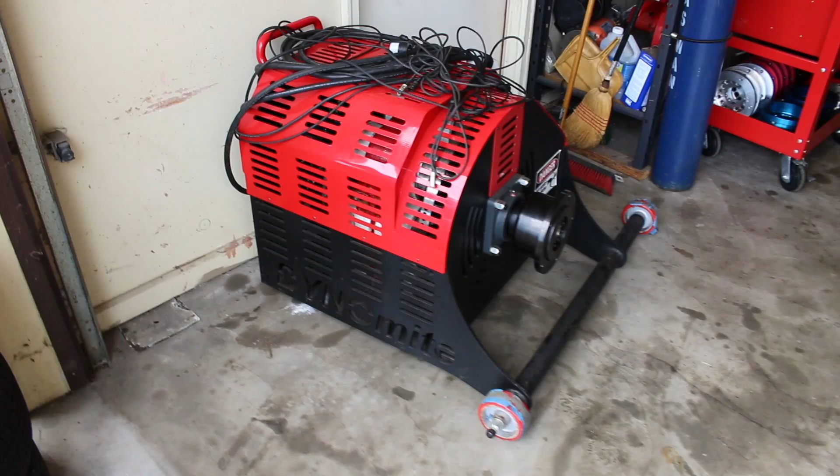For those of you who aren't too familiar about these hub dynos, basically it's the same thing as a roller dyno. However, as you guys can see, it bolts up straight to the hub. So we got Brandon here taking the wheels off just to get it bolted up, real easy setup guys. We'll be back in a couple minutes when she's good to go, and I'll fire the camera back up, and we'll see how much she puts down.

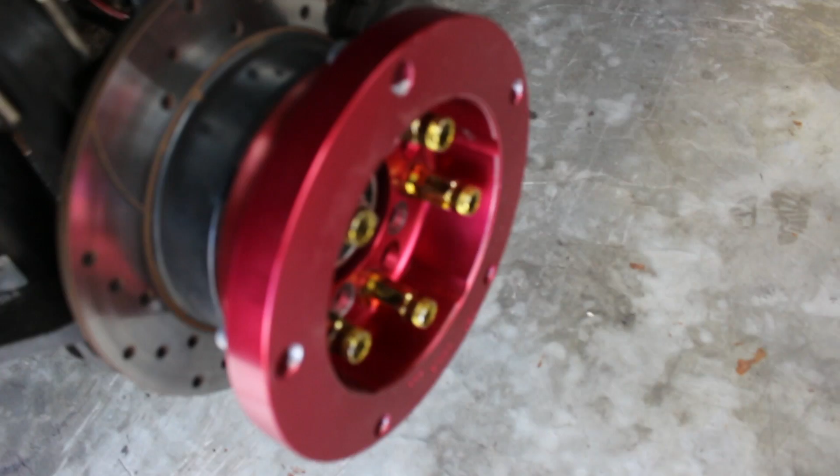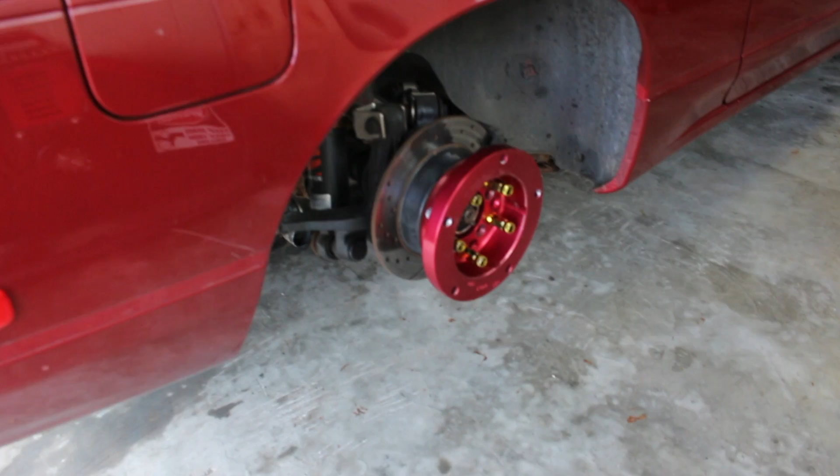Alright guys, well we ran into a bit of a problem here. These lug nuts that I have on my car right now are unfortunately a little bit too long, just because of this little part that sticks out. To fit onto this hub dyno here, the clearance is just thousandths off, so we're about to go get some new lug nuts so we can bolt this up. So we're on the way to AutoZone and we'll be back soon.

We got some new lug nuts from Advance Auto, and we're actually putting them on right now, so we should be good to go in a couple minutes. These guys are making fun of me because I don't know how to use this camera, and I keep recording clips that don't end up recording, but we're gonna get this video done. Like I said, we'll get these things bolted up and show you how these hub dynos work, and we'll touch back real soon.

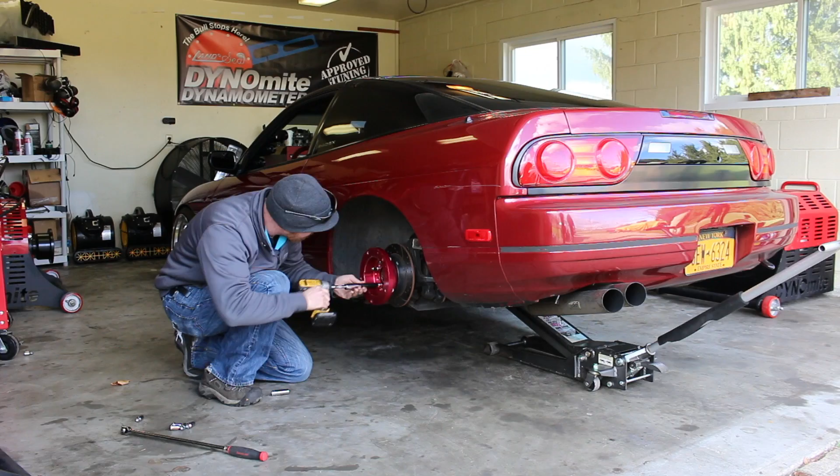Those of you who aren't familiar with these hub dynos, obviously the wheels aren't on, so we got these little adapter plates here that bolt up to the actual hub dyno itself, and Brandon's just going to tell you a little bit how these work in general. I'm just going to flip this mic around guys, give me one second and we'll be back.

Alright, so we've got the adapter bolted on. Now we just got to slide this big heavy absorber into place and get it lined up. I'll do a little fiddling with the jack here.

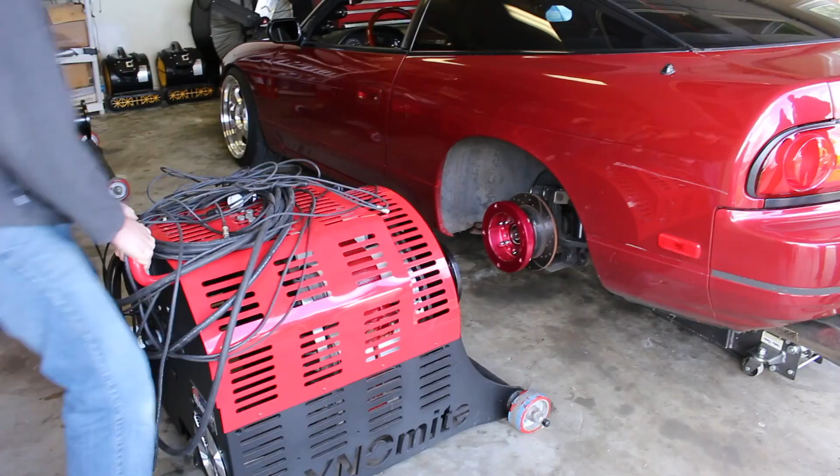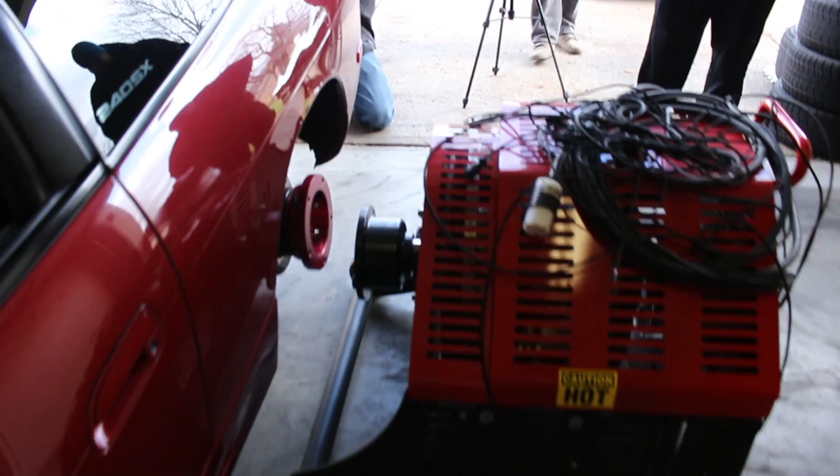Down a bit. Now, can you adjust the angle of what these sit at, just to fit the wheel? How does it mate perfectly? It's got a compensation built into the rear. Oh okay, there, it's got a little shock and spring. Like a gyro type setup? Let's see what happens here.

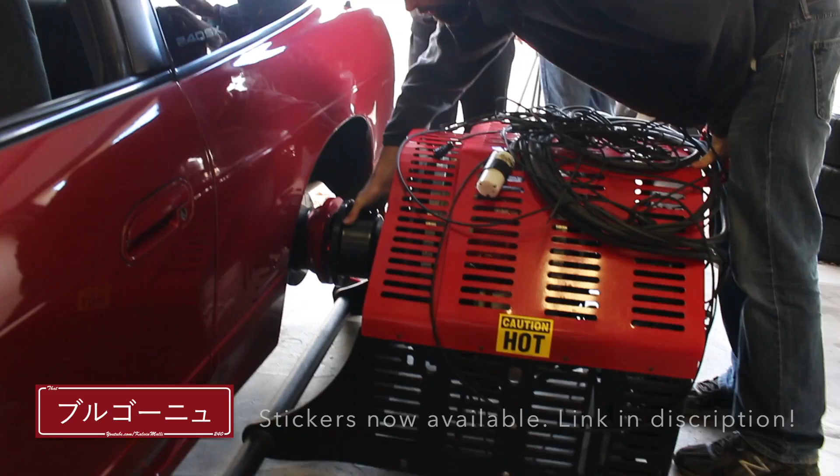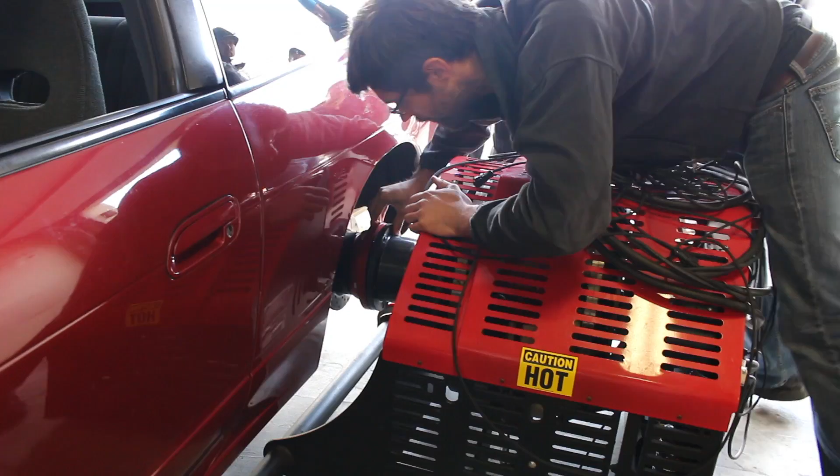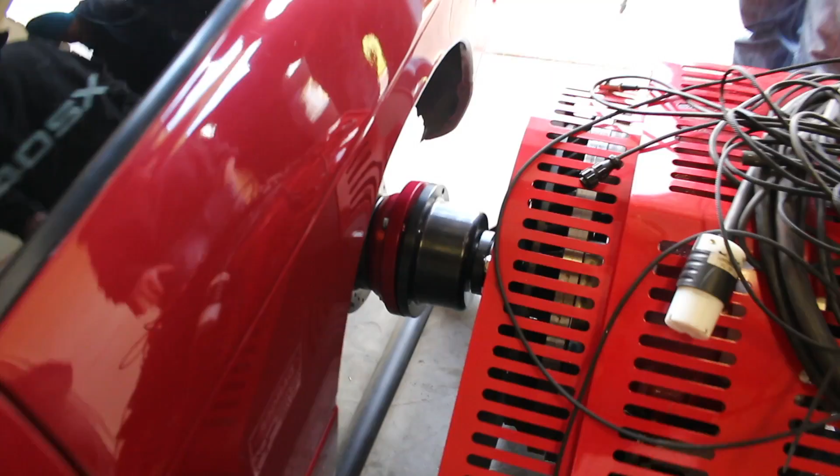You got the car to stop you, so. I got a big misalignment. Some cars line up better than others. It's a big gap, jack it up. Yeah, it's gonna be fun. This is why we hate camber, guys. Right there, it's just not lining up. Yeah, no, too much camber. Compensation's gonna be an issue here. Yeah, that's what I was curious about. Let's see, we can adjust the camber, see this thing basically gets lifted up, but that's...

We can either lift it or I can jack that up and get it started. And then do you just let the weight down? Yeah, yeah.

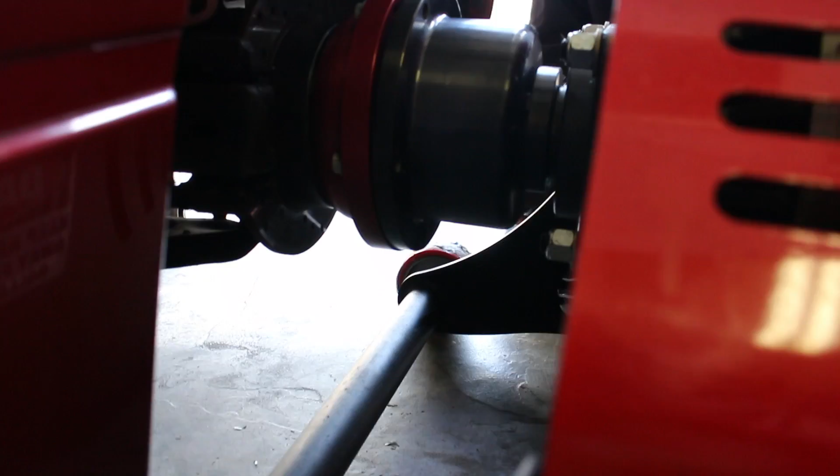Fun times. Alright guys, so obviously you can see, because of the 3 degrees of camber I have, these aren't lining up too well, so we're going to bolt them up at the bottom where they line up and try and basically let the car figure itself out once they're bolted on the bottom, and kind of move this whole hub assembly, dyno assembly itself to get it to line up.

As you guys can see, making our way slowly but surely, but it's fitting up really well now, so we're going to move on to the next side when we're done here.

Alright, so we got the hub dynos on and we're about to lower the car. It didn't go anywhere. So pretty much now we're getting everything set up. I guess hook everything all together, and we'll do some pulls.

Alright guys, so now comes the fun part with connecting everything together, and Brandon's just gonna walk you through the process here, so go ahead man. Alright, so we got a lot of wiring here, as you can see, and basically this side is the master controller that has all the electronics in it that communicates with the computer, and then this wiring goes over to the slave side over here from the master.

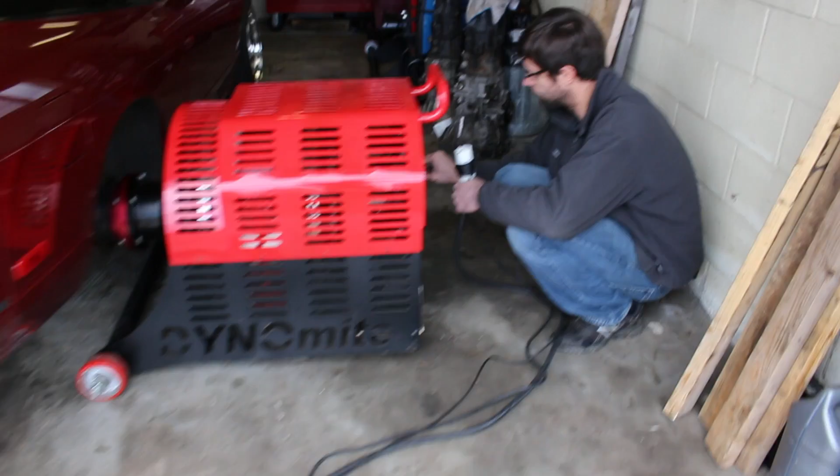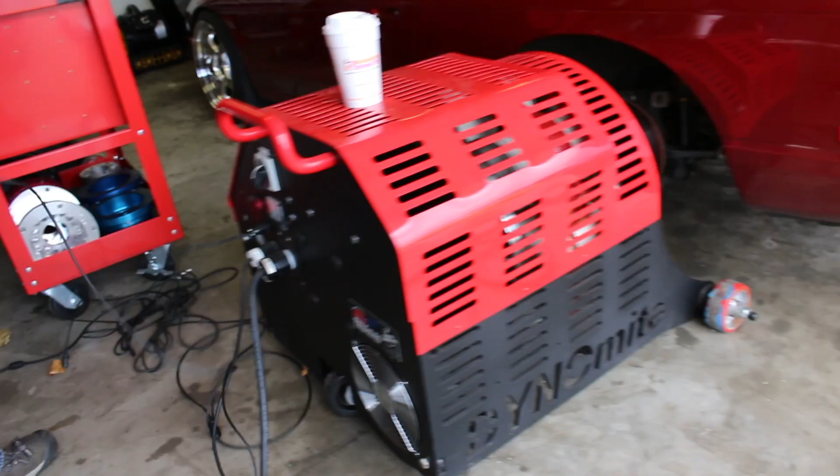Now, how can you tell the difference between the master and the slave? Is there an add-on that makes this one different? Oh okay, I see, this one has all the readouts here. Yep, it's got all the connectors, more wiring inside, and a circuit board in there. I got you, okay, voodoo.

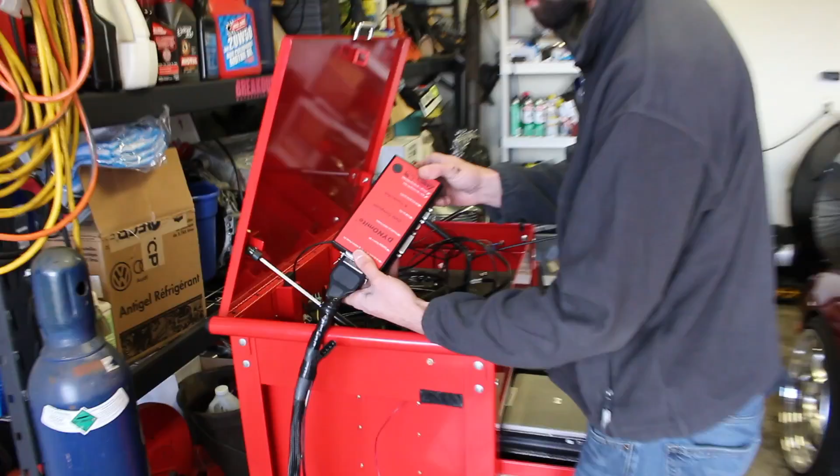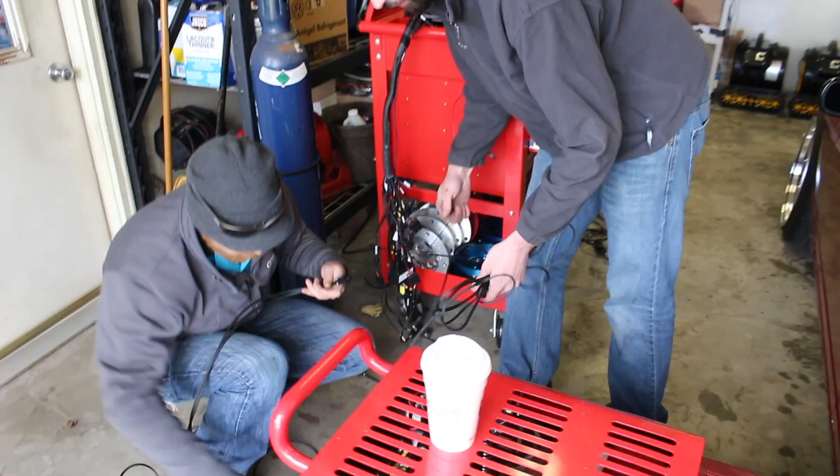So these are the data acquisition boxes that connect from the things you'd like to log or look at to the computer. We've got to hook up all this stuff, including torque transducer outputs, dyno absorber RPM, and other technical data. The harness for it actually goes to the dyno, and there's the connector. Yeah, so this is the torque transducers.

Where's the one for measuring VTEC? Yeah, where's the VTEC solenoid here? That's a secret.

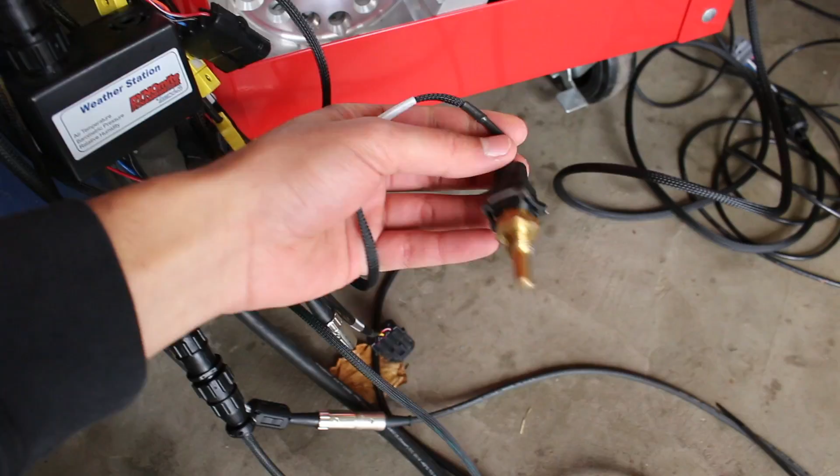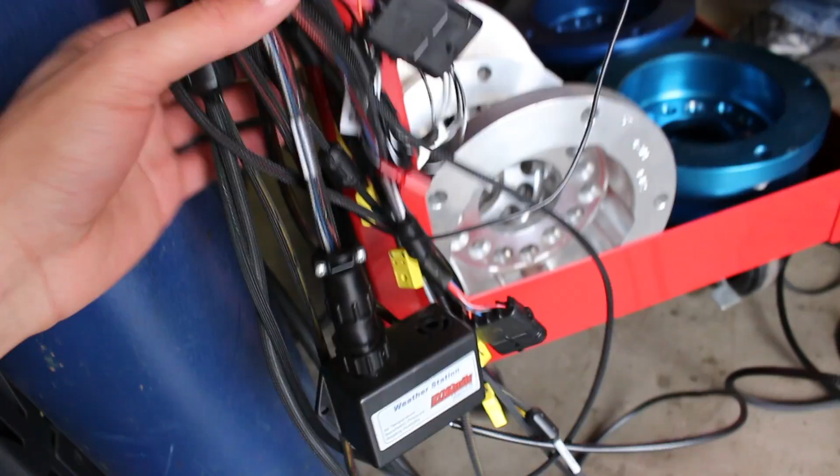So as you guys can see, there's just a big spaghetti mess of wires and connectors here. All this stuff is basically just different readings you can get. As you can see, we have a temperature sensor, and all these yellow ones are little EGT ones. Here we have a weather station, which basically compensates for humidity, temperature, and pressure. But yeah, you guys can pretty much connect and get any reading you want just by connecting anything to either your ECU or the harness in general.

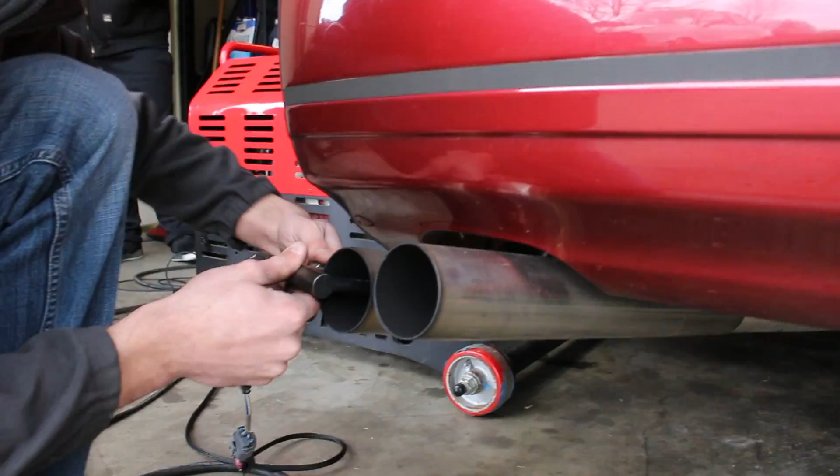Which hole do we choose? We're going to choose the easiest one to get to. What we do here is go back.

Who wants to be called?

All right guys, we got the whole dyno kit set up here, so we're ready to start the car up, warm it up, and we're about to do some pulls. So stay tuned.

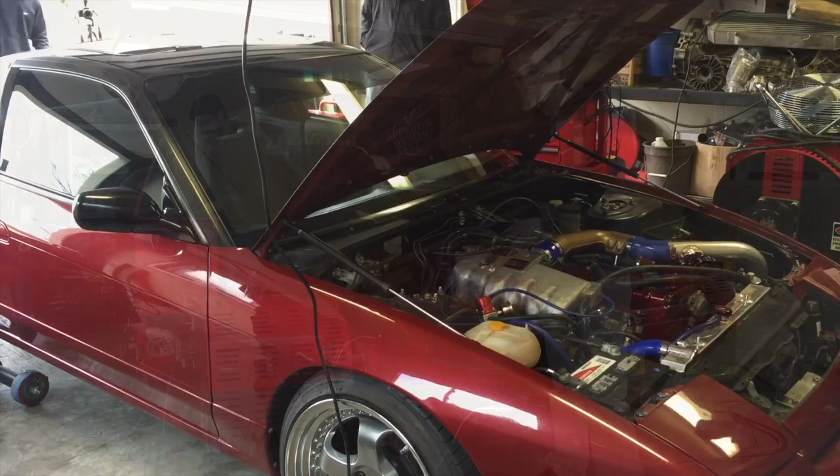Who wants to be cold? When do you want these fans on now? No, probably not yet, let it warm up. Yeah, it's gonna take a while to warm up, once it starts overheating, because his thermostat is stuck open. Oh, so this is gonna take forever. Yeah, it's gonna take a while. How do you turn this thing on? The push button, is there? Did I take the key? There's a key, where is it? I'm scared, here on camera. Watch out for that seatbelt. 90s bro, you have to clutch in to start.

Full gas, horrible start.

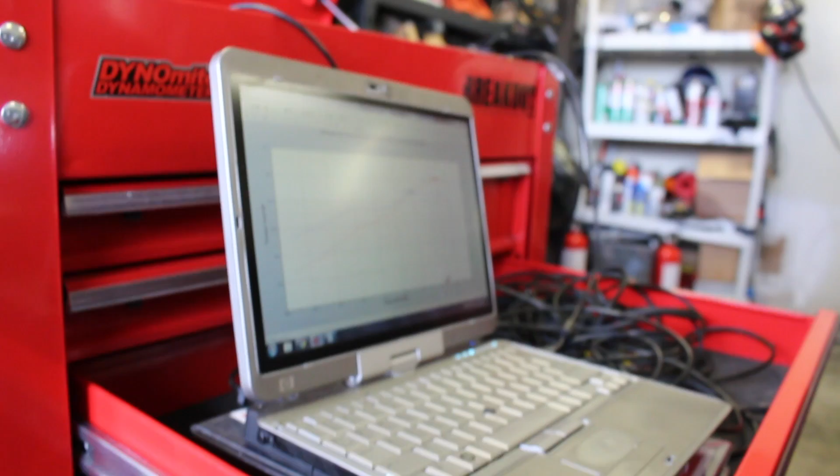This guy thought it was gonna be 190. Get out of here, that was low too. Wow, that's crazy, that's awesome man. That's really good, how much torque? 220? 222? Wow man, yeah, that's good. That's way better than I thought. Yeah, that'll show the real power.

Alright guys, so as you saw, hopefully this camera focused on my face already, but as you guys saw, the car made 250 to the wheels. I mean what, that's crazy. I did not think it'd be 250 by any means, so now we know it makes 250 and about 220 pounds of torque. We're gonna hook up a little boost gauge so we can get a reading on the actual computer itself just to see how boost is holding up, but 250 guys, that's insane. So we're gonna do one more run with the boost gauge sensor hooked up, and yes, so stay tuned.

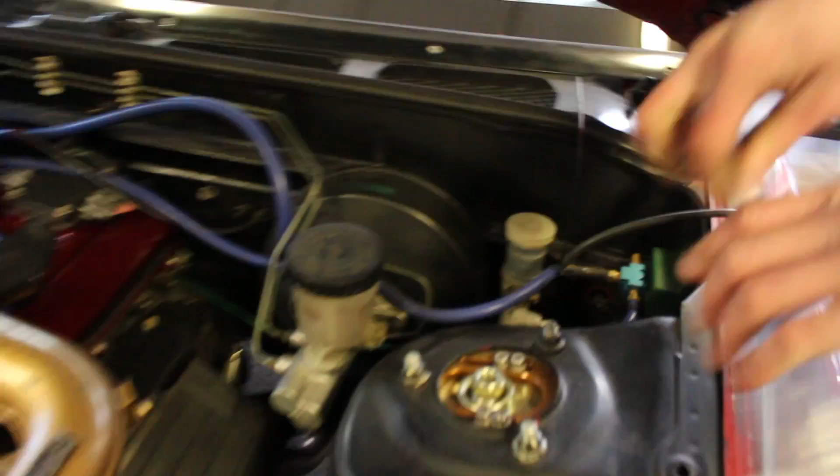Alright, so as you guys can see, if you can hear me over this fan, we're basically splicing in a vacuum line. So like I told you earlier, we can get a little reading on the computer just to see how the boost is holding up through the RPM range.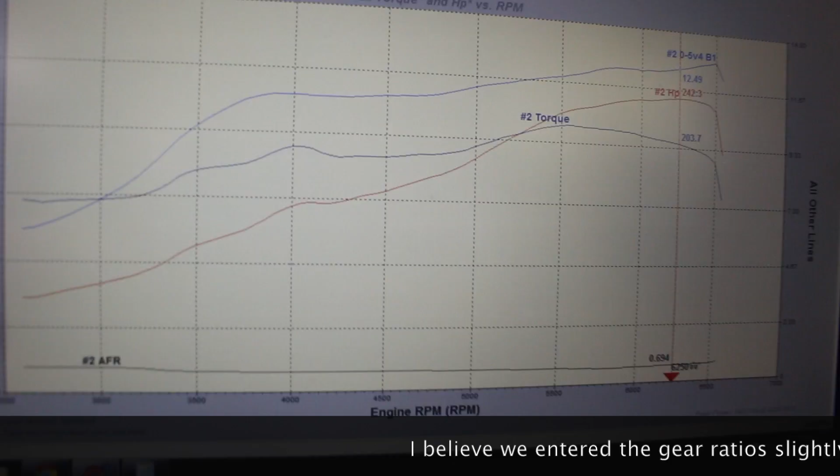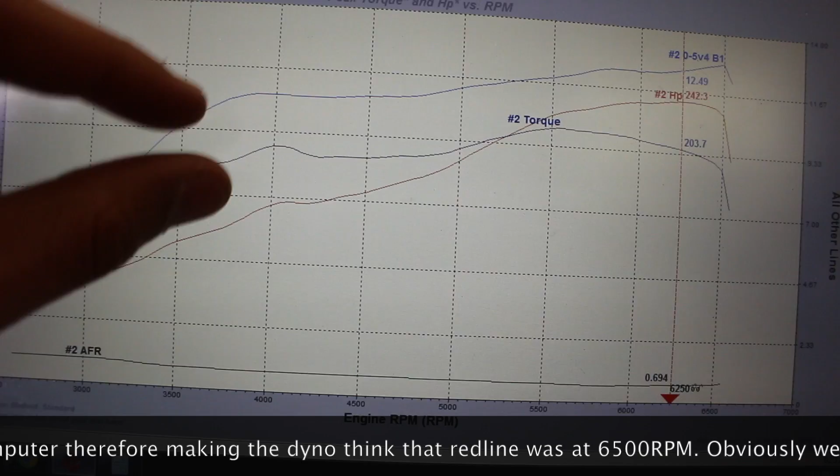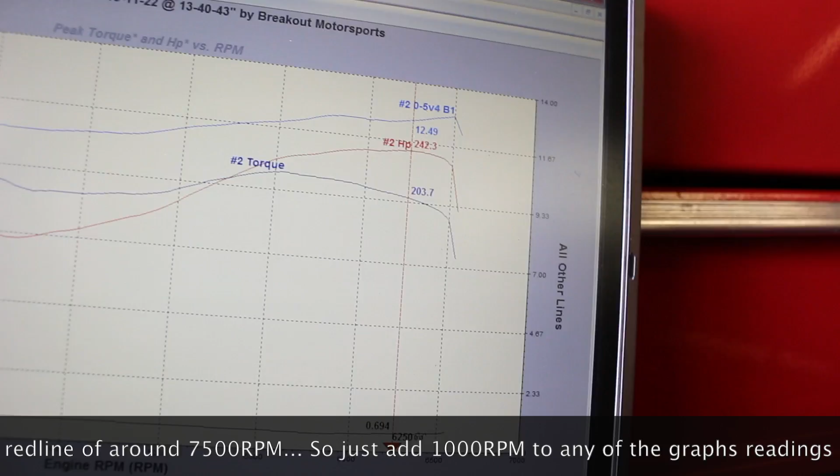Just to give you an update, as you can see from these power curves, the red one is horsepower and the blue one is torque. Right around 4,000 RPM, both of them dive down a bit, not as linear as it should be. So that's how we concluded there's either a leak, or it's running rich up top, maybe around 11.0, or actually I think a little lower, maybe 10 or even high 9s. So we're gonna mess with some boost leak stuff to get these lines more linear.

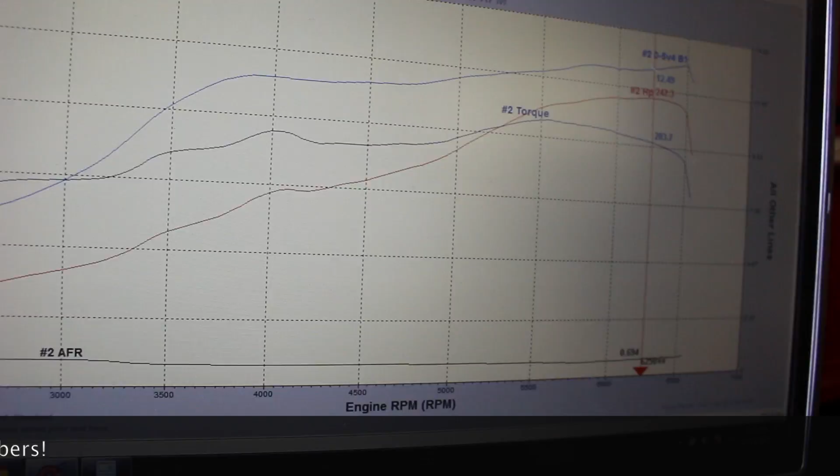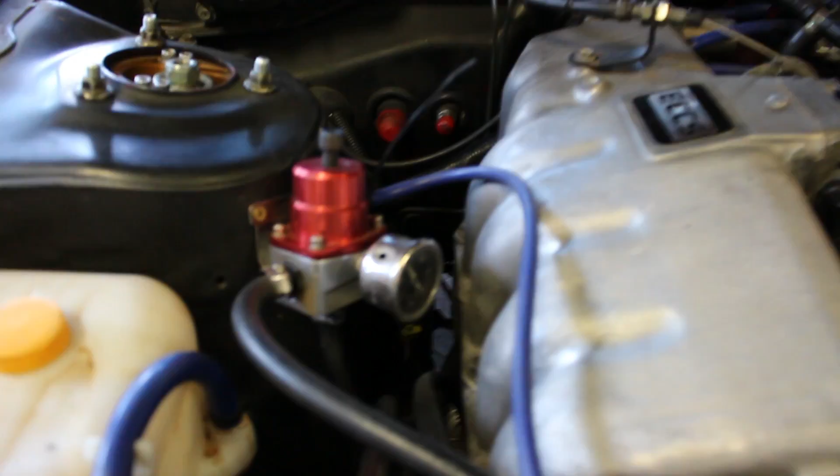The next thing we did to try to solve the problem was take down a couple PSI of fuel pressure. It was a little high, so we took off the vacuum line and brought it down to 42 or 43 pounds without vacuum, then it drops to about 37 with vacuum, which is what it should be for this motor. So we're gonna do a third run and see if that power line straightens out like it should.

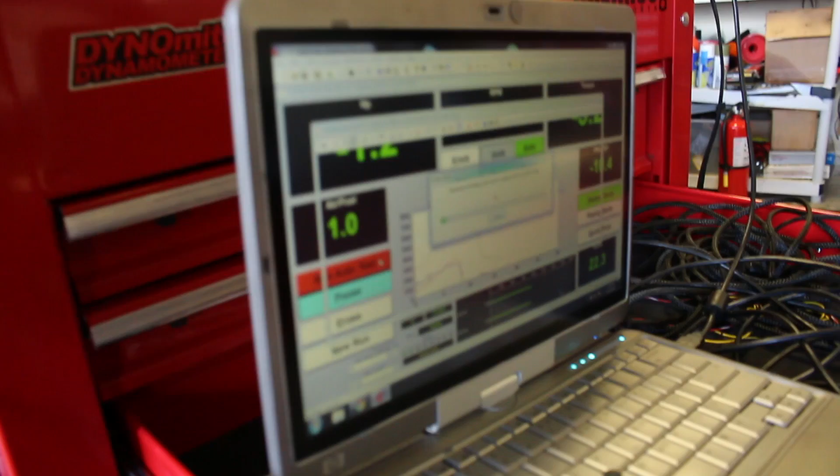How we looking? Hopefully that changed it a little bit. Should have done. Yeah, no, it didn't. Your fuel ratio was a lot better than it was though. Oh, it was? Okay, still losing a little bit of power though, around 4,000.

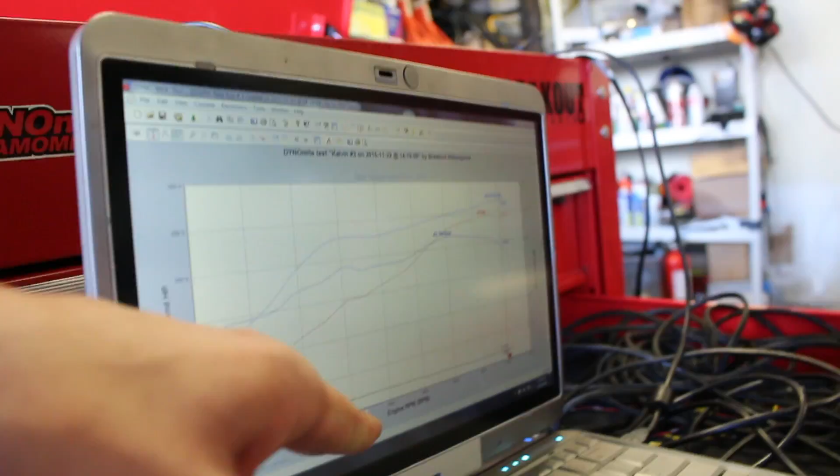So we got the same power, 246 to the wheels. However, we're still getting a bit of a decrease in power around 4,000 RPM. The air-to-fuel ratios throughout the whole RPM range are looking much better though. I'm not really sure why we're losing a little bit of power around 4,000 - boost is actually fine. However, that could be a timing thing, might need to retard or advance the timing, not too sure. But it's not too big of an issue. It's really cool to get an idea of how the car is doing on a graph, how the power is doing.

Looks like we're doing one more pull for you today. We messed with the boost controller settings, so hopefully that sorts out our problems. We're still losing a little bit of boost around 4,000, but everything is looking well as far as air to fuel. We're gonna do one more run, so let's check this out.

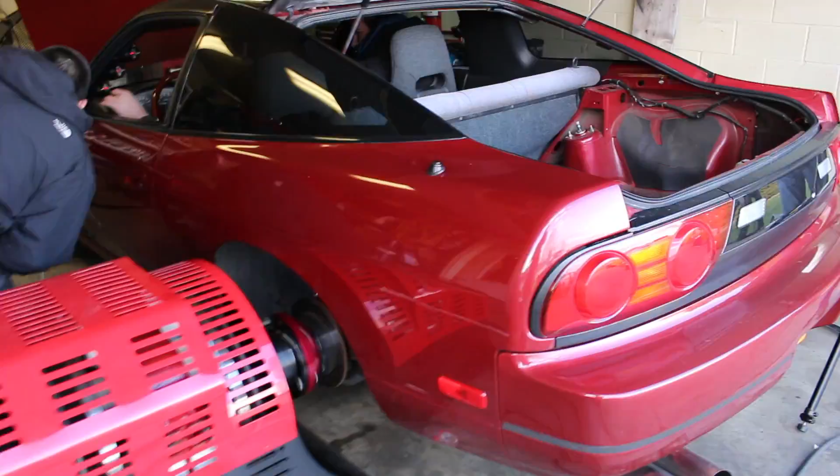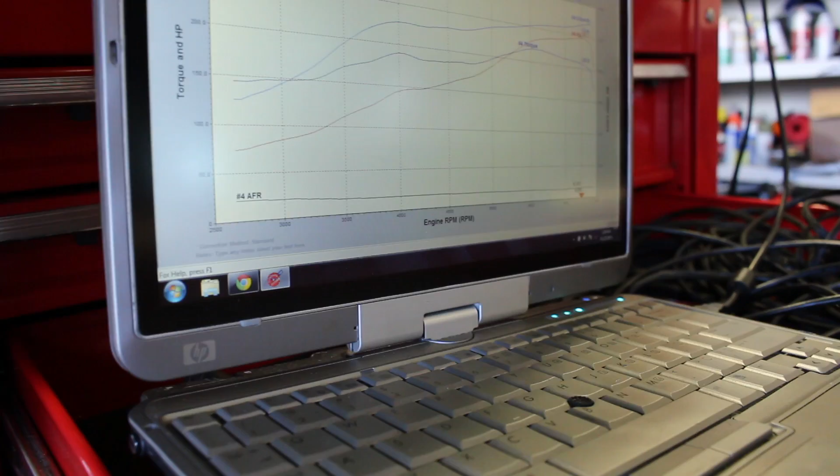Same power, guys. However, as you can see, there's a little bit of a drop in power, not as linear as it should be. This top line is boost, and it drops just a tad, so I'm not really sure what's going on, but it's not too big of an issue by any means. It definitely looks good, and I'm definitely satisfied with the results.

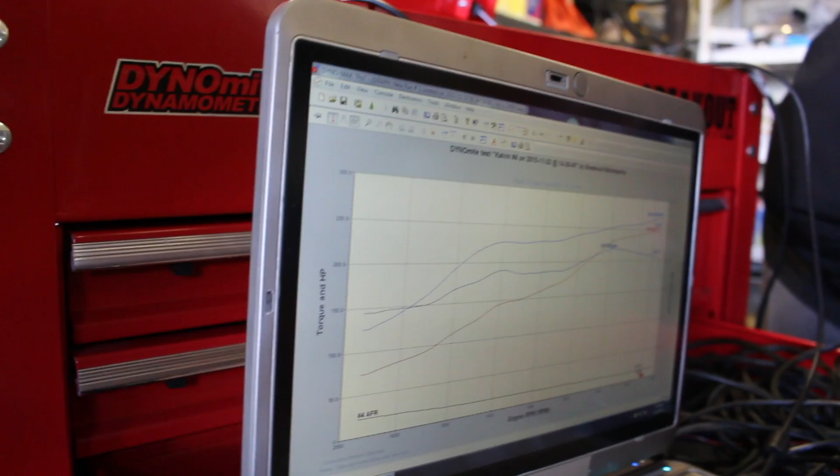Thanks. Figured I'd show you guys my tires here as to all these burnouts I've been doing recently. Right here, it's fully flat all the way across. There's gashes - oh my goodness, worse than I thought. More burnouts.